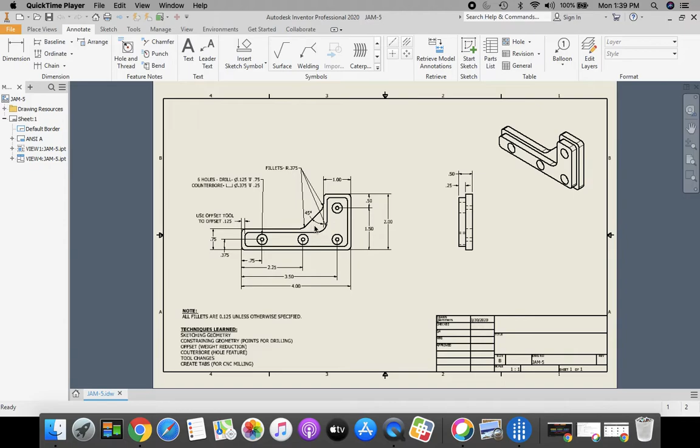Today we're going to be taking a look at our JAM-5 part that we're going to do in Inventor. We have a couple of things that are interesting and new for us. If we take a look at this, it's an L shape, so we're not going to be starting with a rectangle or a circle. We're going to be starting with a line tool to sketch our geometry.

These three fillets here are 0.375. All other fillets are 0.125. And we're going to have a counter bore in here, and we're going to talk about how to use the offset tool to reduce some of the weight that's on this part.

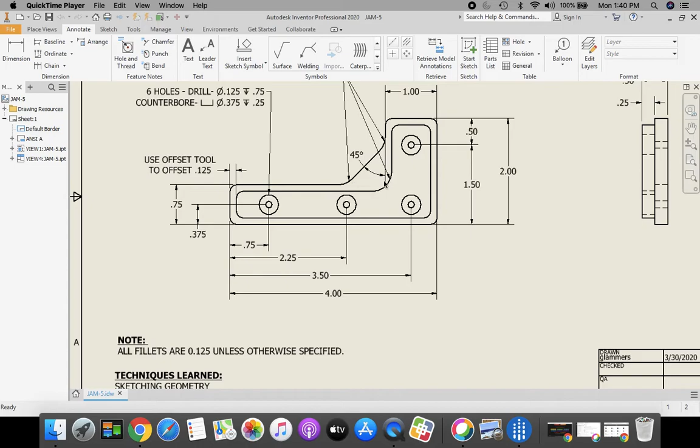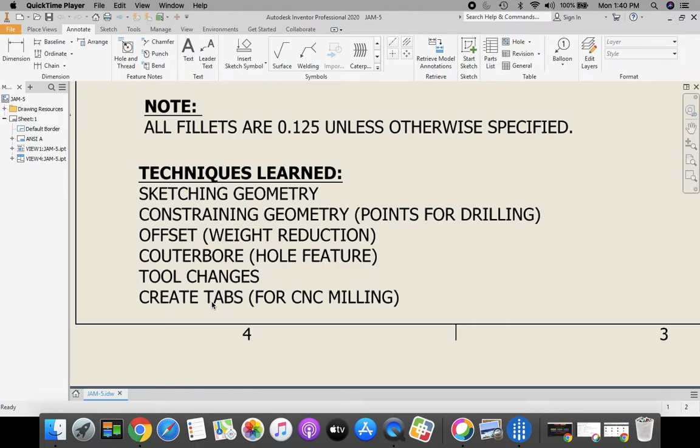Today we're going to be taking a look at the techniques that we're learning. We're talking about sketching geometry, using the line tool, constraining geometry, points for drilling. We're going to be using horizontal and vertical constraints. We're going to offset, we're doing this for weight reduction. We're going to counter bore, which is part of the hole feature, tool changes, and we're going to create tabs. Gavin and Chris, you're familiar with this. Everybody else, this is going to kind of be new, creating tabs.

All right, let's have a little Inventor fun. Starting off from our home screen, we're going to click New, Standard IPT, click Create. We're going to do a 2D sketch from our XY plane. Click Front in your ViewCube.

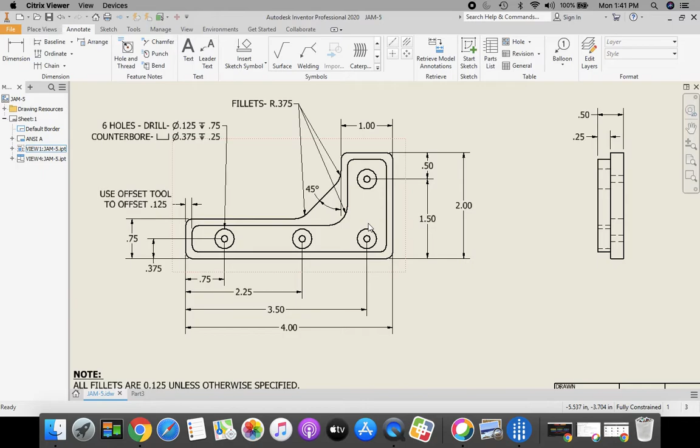And then let's take a look at our part. We have a horizontal line coming across, 4 inches. Then we're going to go vertical up 2, over 1, down 0.5. Then we're going to start back at our origin again and go up 0.75 and finish off with a line going across, and then we'll create this 45-degree angle line.

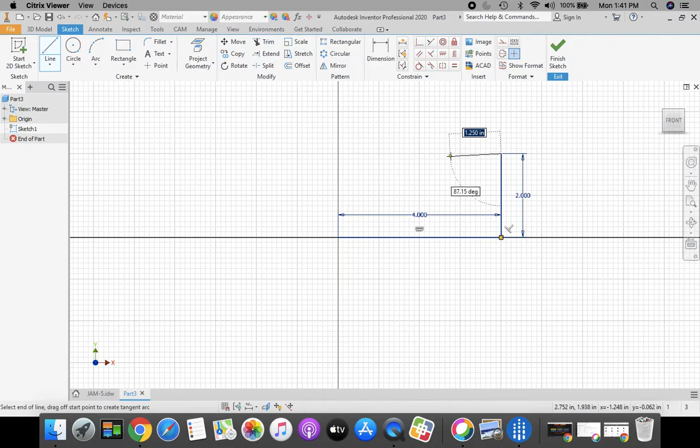So let's do that first. We're going to start with our line tool from our origin. Come out to the right hand side, make sure you have your horizontal snap indicated there. 4 inches, enter. We're going to go straight up in the air, make sure you have that vertical or perpendicular snap holding. Enter, come across that perpendicular snap 1, and we're going to go down 0.5.

Okay, starting with the line tool again at our origin, we're going to go up 0.75, and we're just going to finish off with this line going straight across. It's well past where we need it to be, but we got to put that angle line in there anyway.

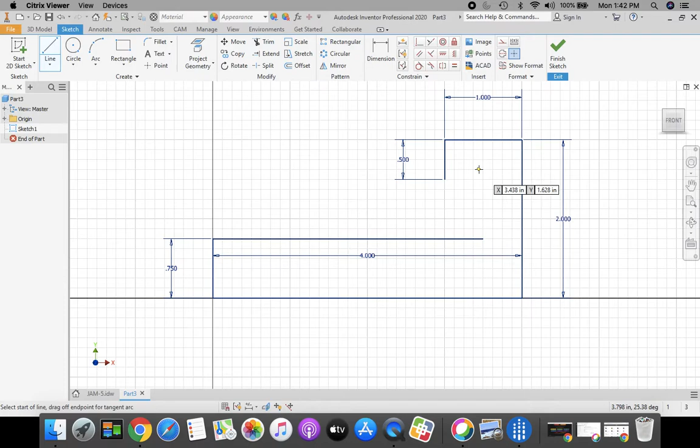So now with my line tool again, I'm going to start at the endpoint, and I'm going to come down, making sure I touch this horizontal line. I'm going to click, and now I'm going to enter in a dimension for in here. This is 45 degrees.

Now this little tagline right here we don't need anymore, so let's trim that out. It flipped my dimension to 135. That's the opposing angle of the 45-degree angle we had in there, so that still looks good.

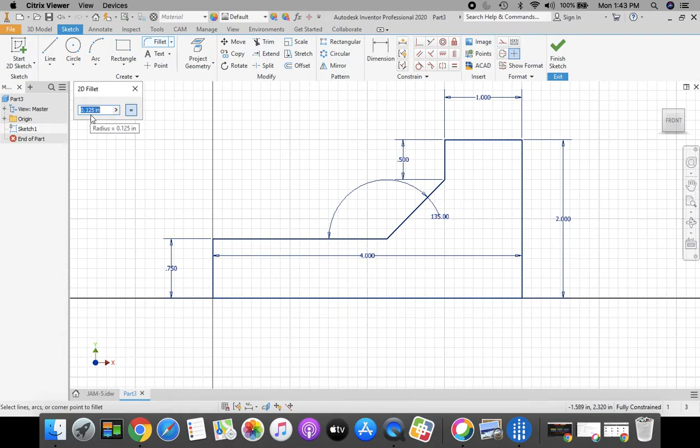Next we're going to place our fillets in here. All of our fillets are 0.125 except for these three fillets up here, which are 0.375. So let's show you how to do that. Fillet tool, 0.125 comes in as default, and I need that, so I'm going to go around and select all my corners that are 0.125 and fillet these corners.

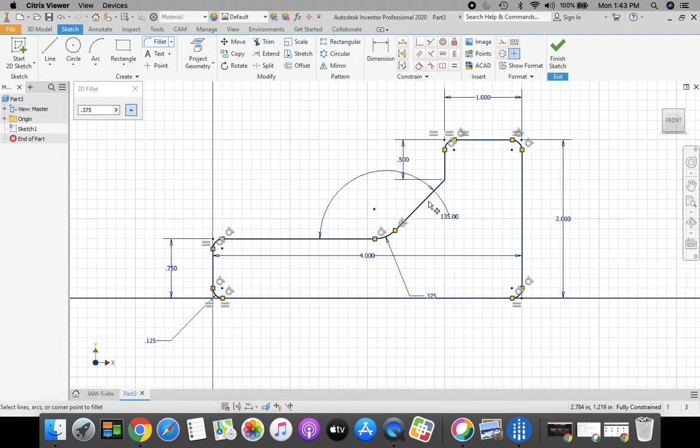Okay, once I'm done with that, I'm going to change my dimension to 0.375, and I'm going to click my two larger fillets.

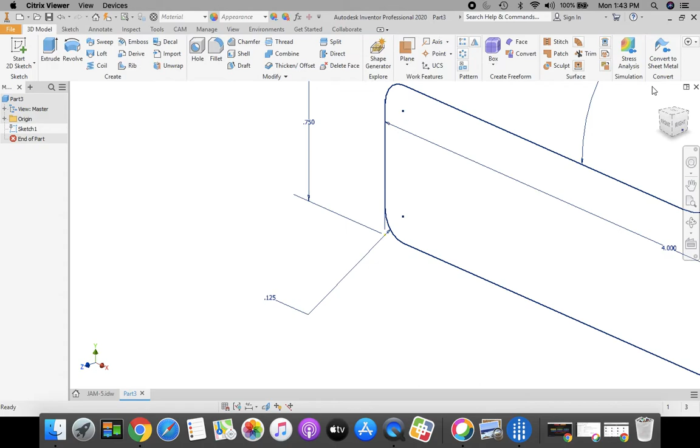Looking good. Once we're finished with that, going back to my drawing, taking a look at my side view here, you can see that my overall thickness is 0.5. So going back to my part, I'm going to finish sketch, go home, we're going to extrude. We're going to extrude in the flip direction, direction 2 here, and then it's going to be 0.5 for my distance. Click OK.

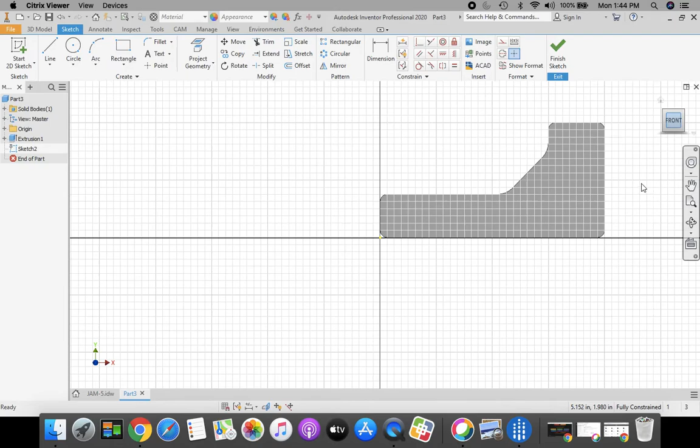We're going to take a 2D sketch, place it on our front view. We're going to get ready to make this rib area going around. So if you take a look at our drawing, we have this rib area going around the whole part, and this is done for weight reduction in this part. We're going to show you how to do this.

That is going to be using the offset tool, 0.125, and that gets offset 0.25 for the depth or thickness here. Okay, back to our part.

If you click the offset tool right away, since we didn't draw anything on this sketch, nothing comes through, but that's still what I want to take and offset. So before I get my offset tool, I have to project my geometry. I'm going to click the Project Geometry button here, and I'm going to select the part that I have drawn beneath this sketch, and it's going to bring it up.

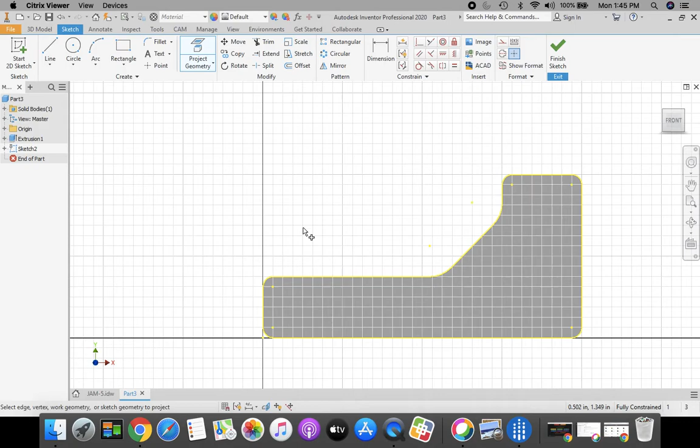Now I can use my offset tool, bring this in, make sure it's coming to the inside of your part, not to the outside, inside of your part, 0.125. Enter on the keyboard.

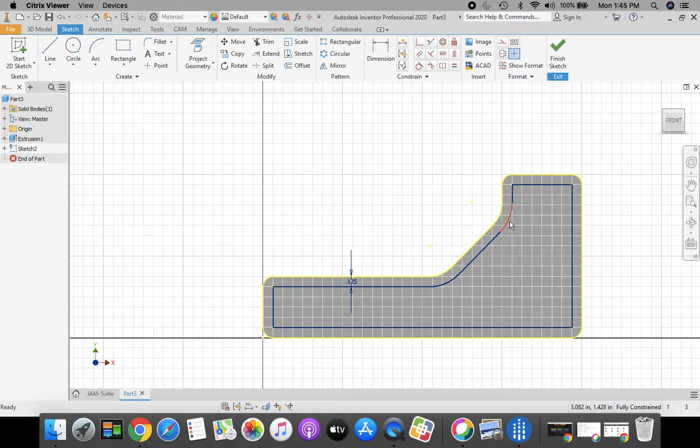That looks great. Now we have to delete some of these areas out of here. So I'm going to right click and delete, right click and delete. And now it's as simple as choosing my extend. I'm going to extend my line down, extend my line over.

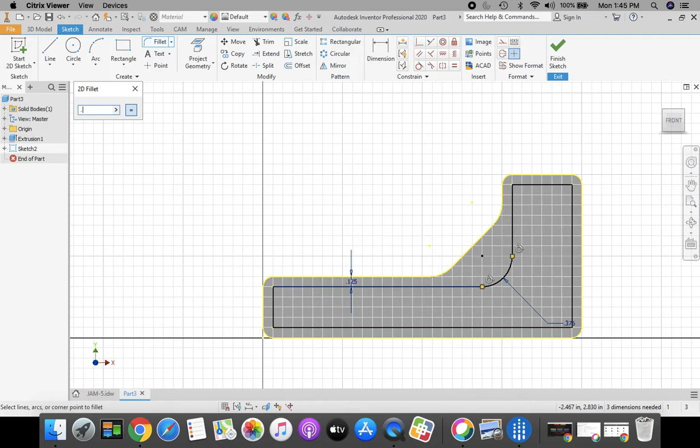And then I have to trim this area out of here. Okay, now we're back on the fillets. 0.375 was the last one I typed in, so that one goes in here. I also need 0.125, and that's all these other fillets around the outside. I'll give you a second to put those in, and then we'll move on and extrude this part.

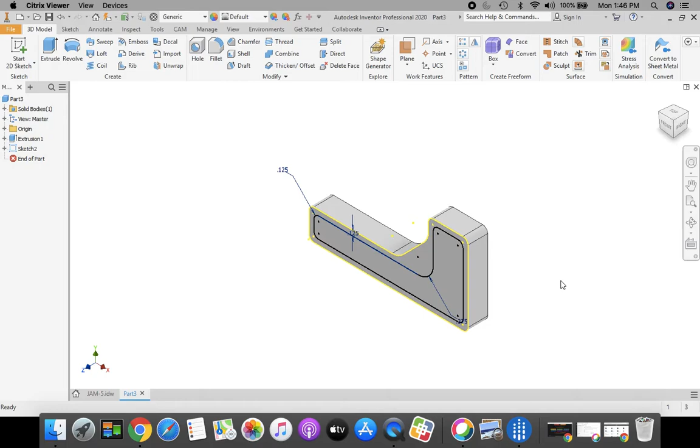Okay, I have those fillets in. Now we're going to take the green check mark, finish sketch, and we're going to extrude. I want to extrude this outside area, outside of my offset.

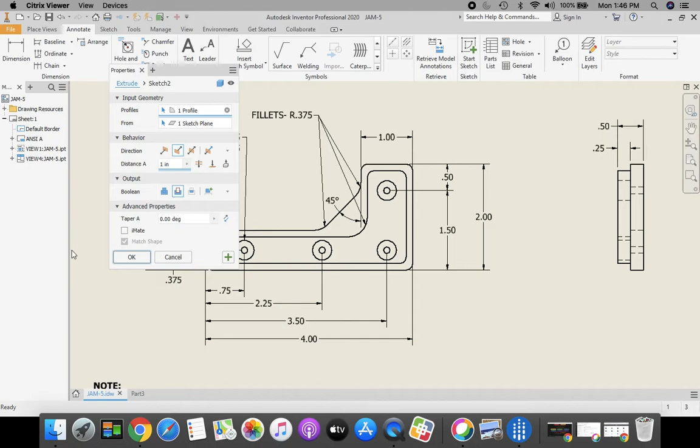This is going to go in flip direction number 2, and I am going to extrude a distance. Let me show you where I see that. This distance right here, 0.25, for that rib going around. So my distance I'm going to put in as 0.25 and click OK.

It's looking great so far. Now the next thing we have to do is take care of these holes that are in here. You can see there's a couple identified, 0.375 up, 0.75, 2.25, and 3.5 in. And then we're going to use our horizontal constraint to constrain these to one another, and vertical constraint to the one on the top.

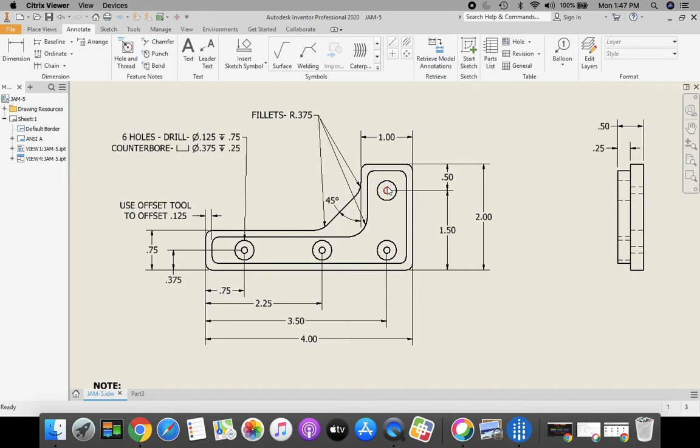But first, let's place those points. So I'm going to take my 2D sketch, place it on my front view. Click Front in your ViewCube. I'm going to click my Point tool, and make 3 points along the bottom, and 1 point kind of raised up on that L area.

I'm going to place the dimensions in for the ones that are known from our drawing. This one is 0.75. My next one, 2.25. My next one, 3.5. And from the bottom up to here, 1.5.

Okay, now we're going to come back up to our horizontal and vertical constraints. First, I'm going to horizontally constrain the point on the left to the point in the middle, and that should line them up even. Oh, I missed one dimension on there. From the bottom to that point, this dimension over to the side is 0.375. Okay, my horizontal constraint still works on that, so let's continue with that.

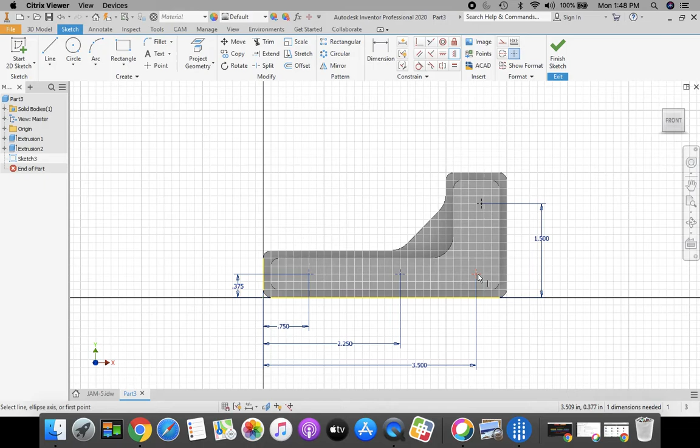I want to constrain from the second point to my third point. And then I want to change to vertical constraint. I want to vertically constrain my bottom right point to the top point. Okay, once you have those done, green check mark, finish sketch.

Going to use our hole tool, and up here we are going to have our hole type as a simple hole. The seat we want identified as a counter bore right here. We are going to go all the way through. Okay, we could put a dimension in there if we want, but we're going to go all the way through.

And then my diameter that I'm going to type in for my counter bore is 0.375. So right here, type 0.375. The depth of that counter bore, 0.25. And my drill diameter is 0.125.

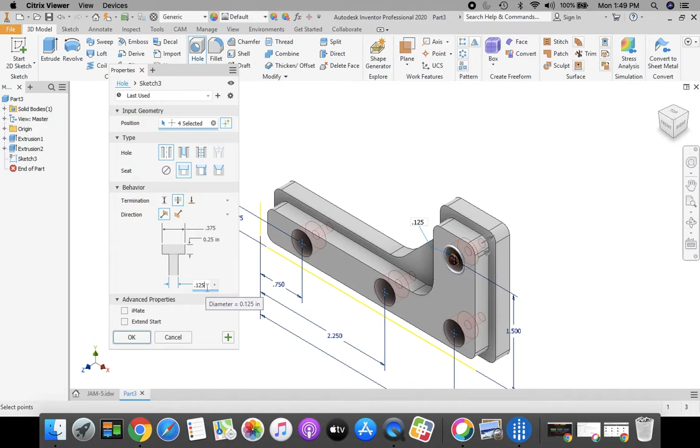Okay, once you have those entered in, once again, that's simple hole with the counter bore for the seat. We're going to go through all. 0.375 starting at the top, 0.25 for the counterbore depth, and then diameter of the drill is 0.125. Once you have those done, click OK.

Looking great. Part looks done. Let's go up to default, scroll down and make this material pink. Now the reason we're putting this tab or rib going around here is it drastically reduces the weight that our part can be, and it lightens the load of this actual part.

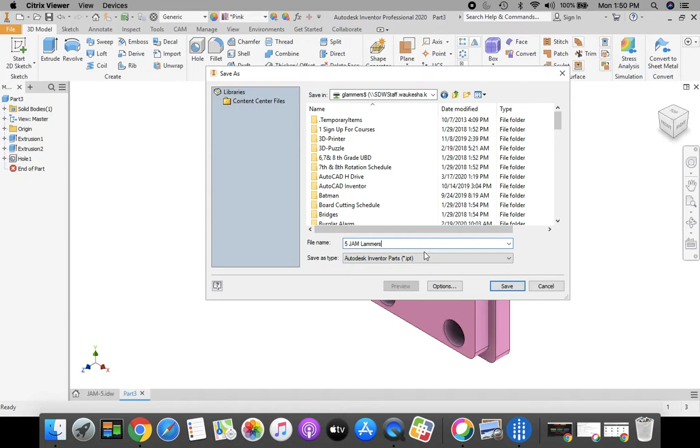And congratulations, the next video that we're going to do is how to run the tool paths on this and create those offsets and create the tabs with our tool changes. Nice job.